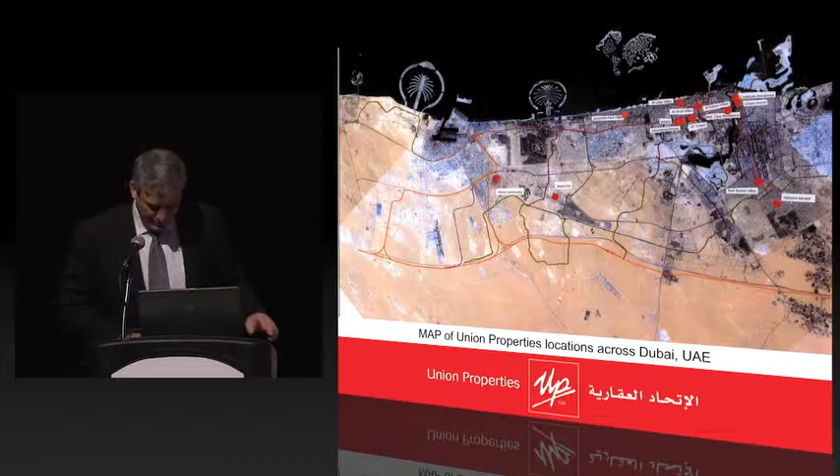Union Properties' success has been directly related to Dubai's success. We're a publicly listed company with shares traded in the Dubai Stock Exchange. Next year, UP will celebrate its 25th year, and our growth from a small portfolio of real estate assets to becoming the third largest developer in Dubai.

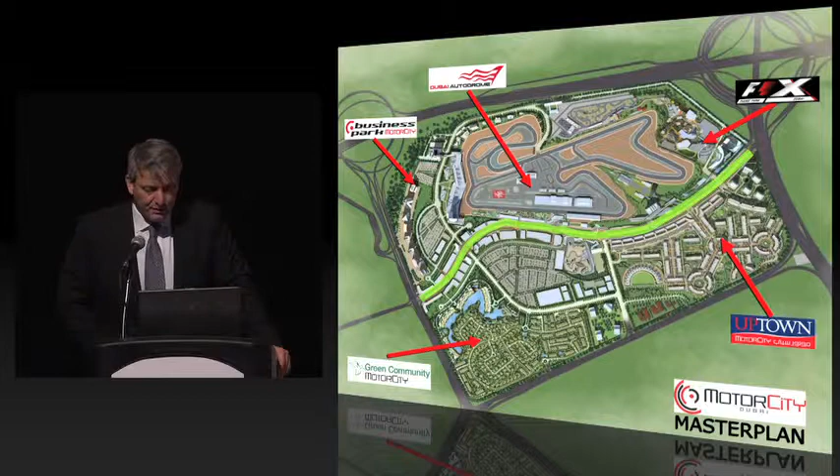The first is Motor City. What we've learned from this is scale. This is the master plan, comprised of 5 components, as you see here. It's literally built around a racetrack. Motor City is an entire city, home to 40,000 people when it is completed. The center is a Formula One certified racetrack.

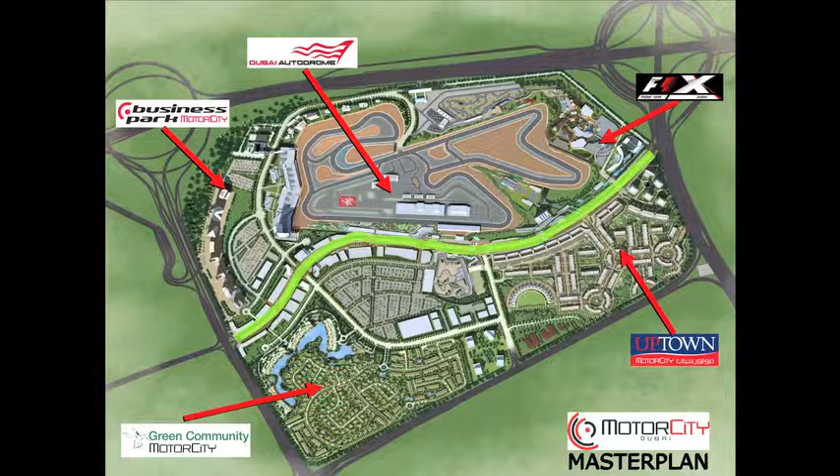Next to it is the F1 theme park. Then we have medium density residential, low residential, and the business park. A day at the races, our theme park, which is still under development. If anybody is interested, we're looking for a JV partner to finish this one.

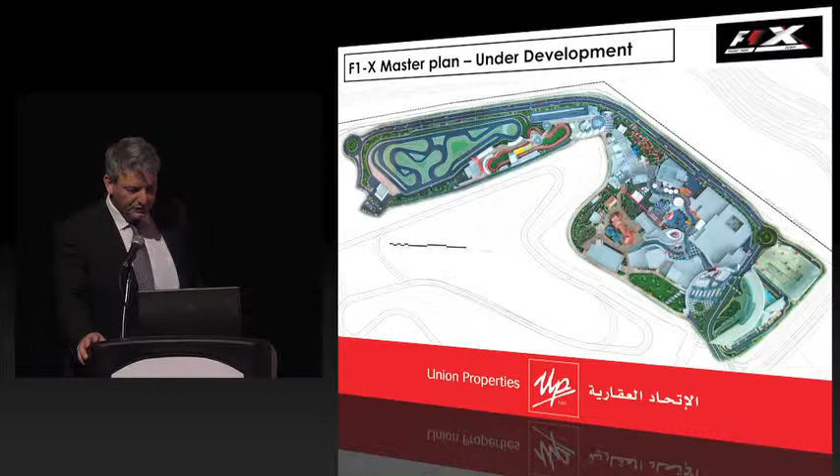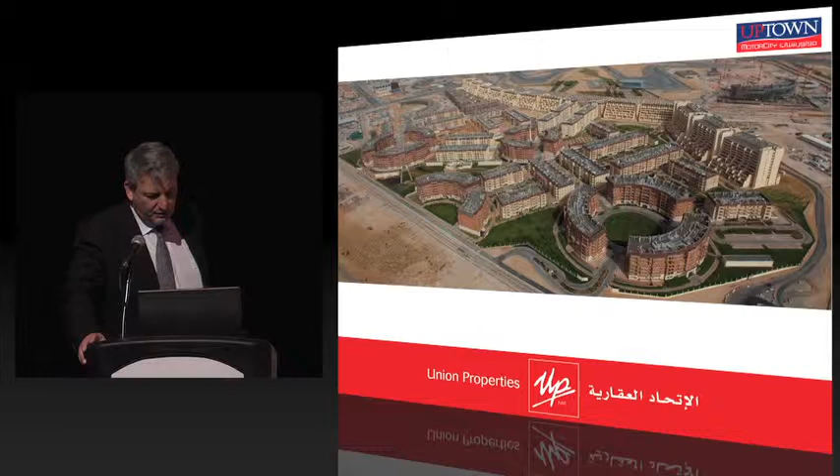This is the medium-density uptown Motor City, also 100% built. The original design concept was a European spa town. Various unit types. Leisure facilities include the pools, gyms, playgrounds, and a high street, a commercial area with retail services and F&B.

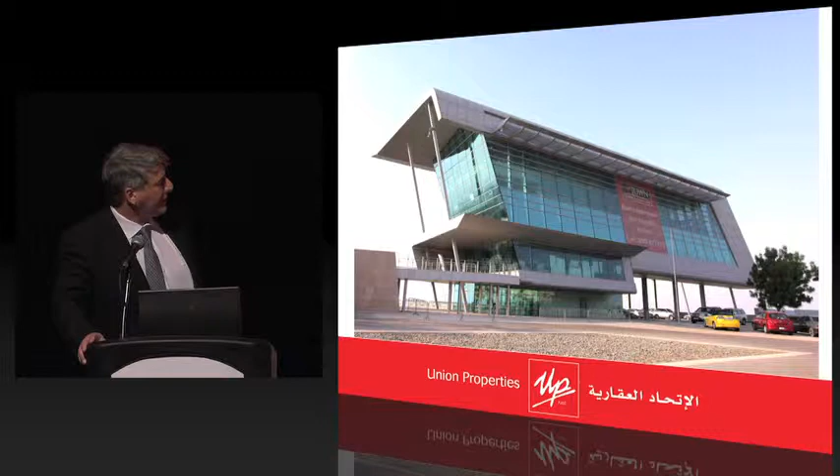The last section in Motor City is our business park. That's their control tower and our management office.

Moving across town to the Central Business District, we have our next project, which is the Limestone House. A unique concept that's been designed to the time-honored specifications of the master stonemason. The window length, breadths, heights are all determined by the traditional dimensions of masonry blocks. It's adjacent to the Ritz-Carlton Hotel.

There's also 16 residential spaces that complement it. It's designed by Gensler in San Francisco and built by Bouygues.

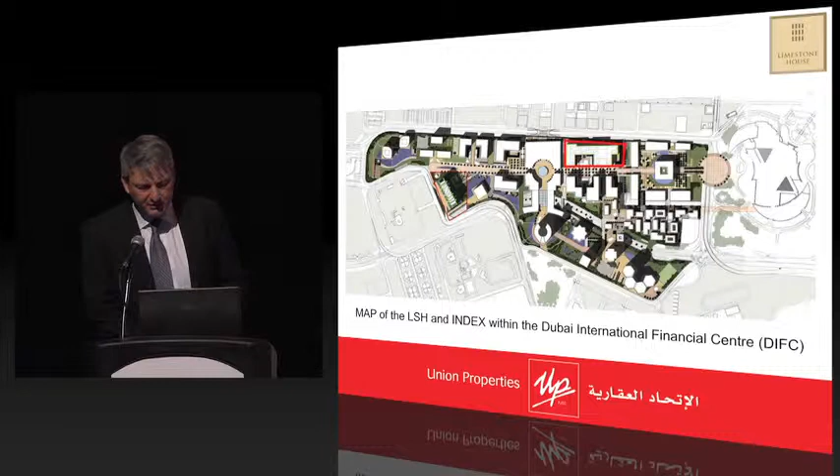It's worth mentioning a little bit about the DIFC - a very unique product. The Dubai International Financial Center is a city within a city, a financial city within a city. In the center of Dubai, they've segregated 45 hectares of space, and though it's within Dubai city limits, it's administered separately with its own governor, its own legal jurisdiction, its own court system, all based on international business law, which takes precedence over local laws.

It's a 100% free zone, allowing foreign ownership and zero taxes on income and profits. Unlike some of the other financial districts which become ghost towns after trading hours, the DIFC is a center for living, working, shopping, F&B, entertainment, as well as cultural and leisure activities.

In total, there will be 40 towers, all built on a common podium. The built-up area is approximately 4 million square meters.

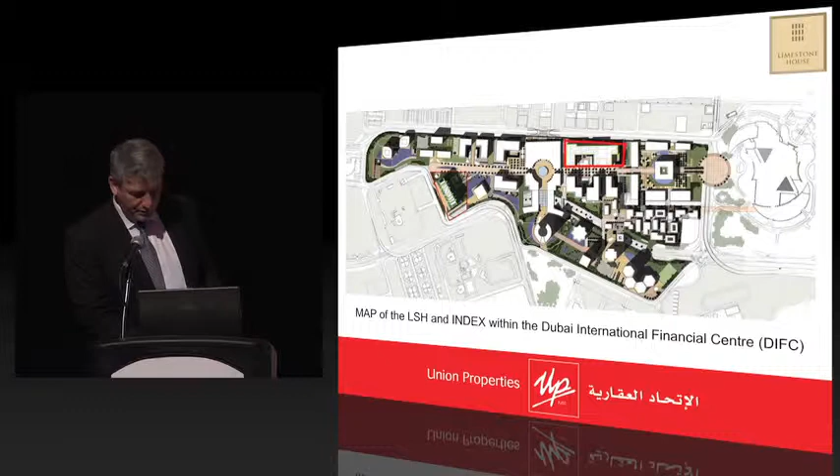Finally, getting to the Index - it was the change in legislation in Dubai which allowed foreigners to own freehold property that allowed Union Properties to take on the idea of combining both what we saw in Motor City, which was scale, and what we were accomplishing in the Limestone House, which was grade A residential, to take on a project like the Index.

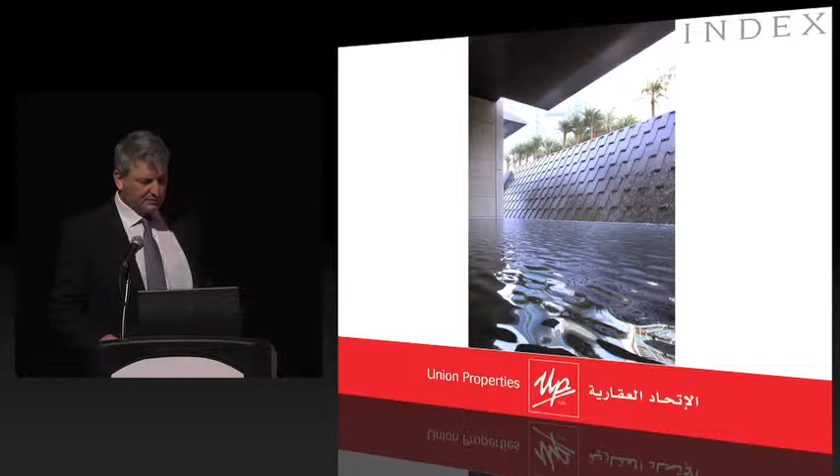It's destined to be a regional landmark, if not an international one. These are some images of the entryway to the commercial and the retail, and a rendering of the penthouse.

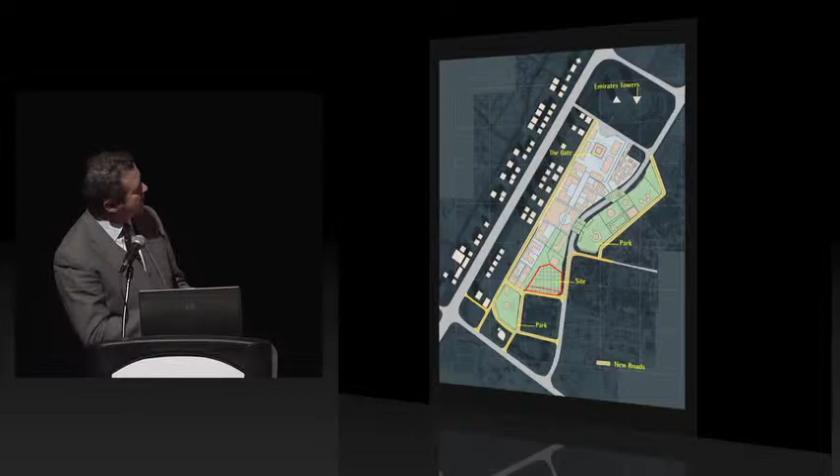So one of the first things we did is really try and think about the context that the site's in. There were views from the site across to the Gulf, and also back towards the city and the Emirates Towers, which were already built. And then there was the anticipation of the Burj development over on this side, and a number of other developments in the Palm.

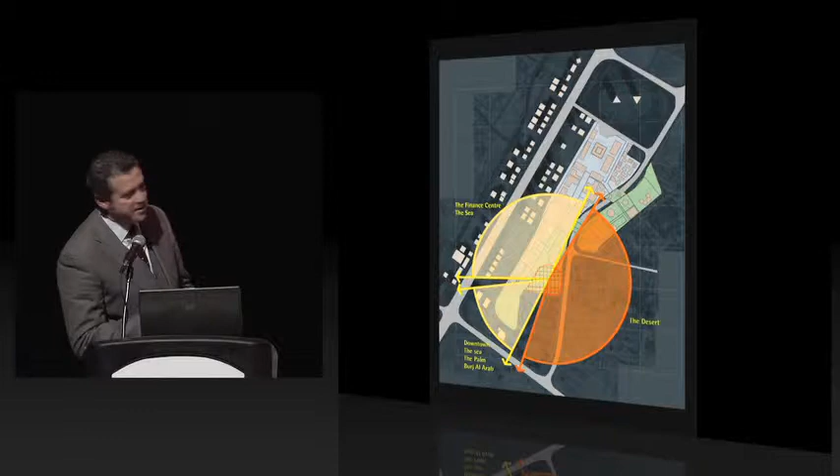But pretty much on this side, there were no views. This was really out to the desert. At the time, things have changed, but originally that was what we felt was happening there.

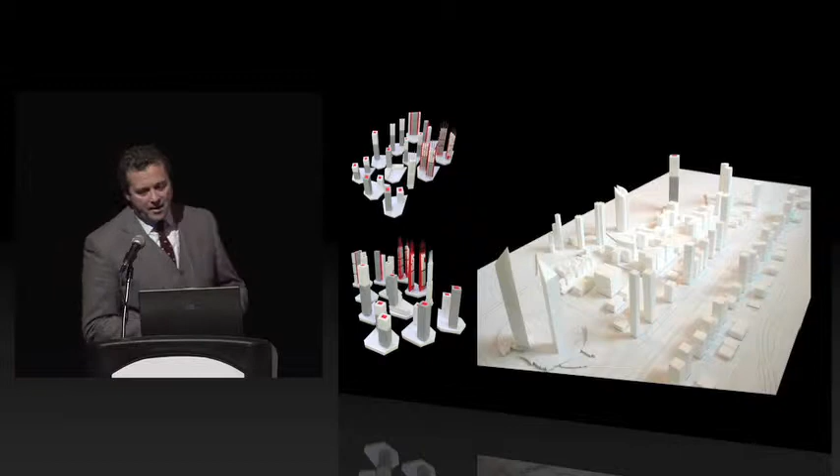Like a lot of people, we start a very intuitive process in thinking about buildings through physical modeling. And these are just a small example of some of the schemes or some of the forms of building we started to play around with.

This again is our very sketchy model showing how we anticipated that master plan to be built. And you can probably see from some of these very early models, we had some idea of how the building form may take place.

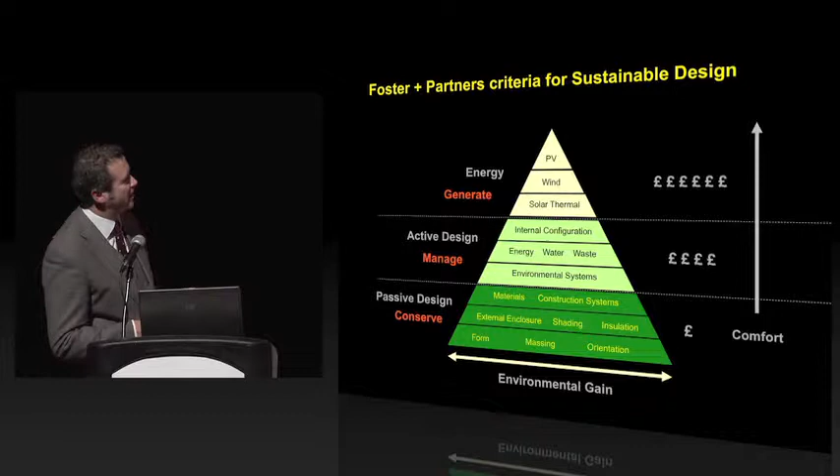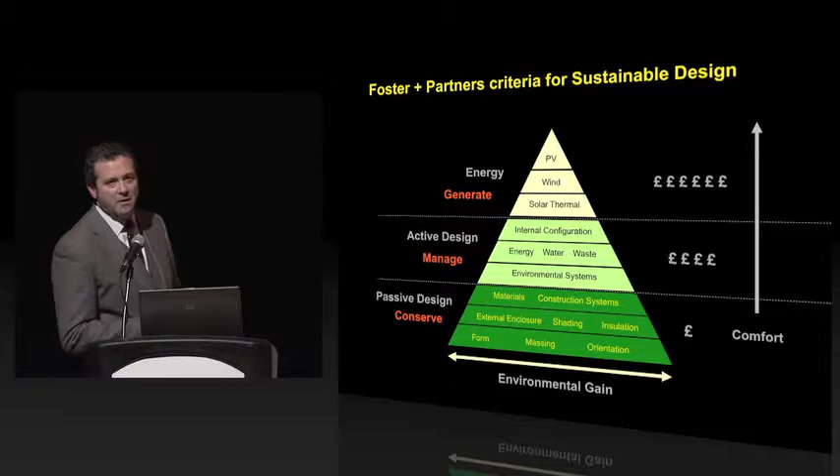One of the things we do when we think about buildings, and particularly sustainability in architecture, is use this diagram quite a lot. It's quite simple, really. The thinking, the non-active elements of architecture and design sit at the bottom of this triangle - things like material choice, systems of construction, external enclosure, massing of the building, form of the building, orientation. All those are design processes we can go through, and you get the biggest bang for your buck because the cost of those things is really with the architect and designer. It's not until you move up this triangle that you start to use active systems and the associated costs. The purpose of this talk is to talk about how we approached the design and form of the building using ideas from this passive design part of the triangle.

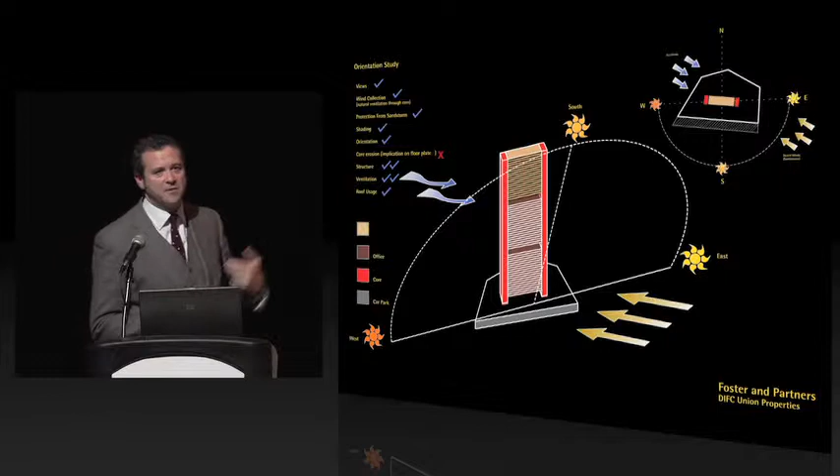Simple diagrams like this are very useful because they question how the form and orientation of a building can work. We simply ask, what happens if this is done like this? What happens if this is done like this? What are the positives and negatives? This is one of a number of diagrams we went through, and this is the one we ultimately settled on. The idea of thinking about a building without a central core, and pushing the cores to the perimeter of the building, was something we thought about very early in the process.

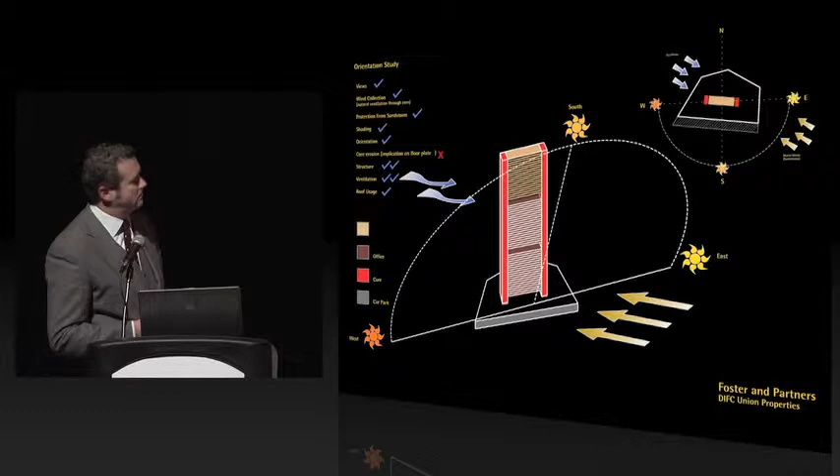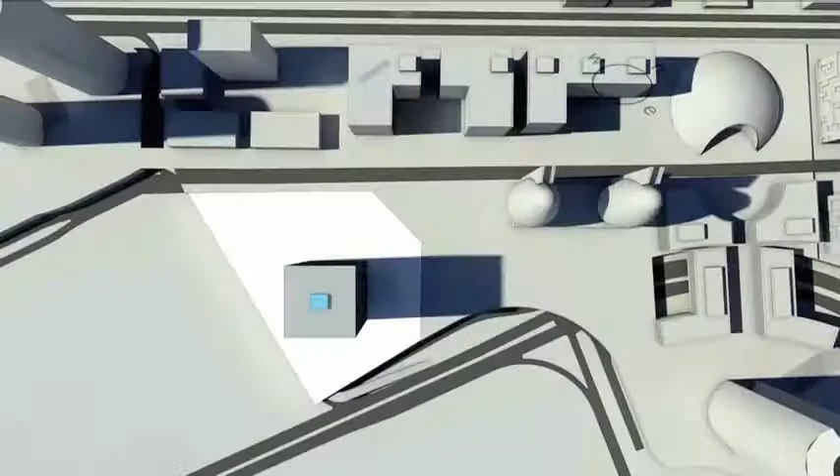This is a small animation which will explain the diagrammatic process of how we got to the building form you see today. If you think about a simple building form with a central core, one of the first things we thought about was orientating the building so it faces east-west, then taking the core and splitting it away from the center, pushing it to the perimeter of the building on the east and west side. That helps reduce the solar load onto the building.

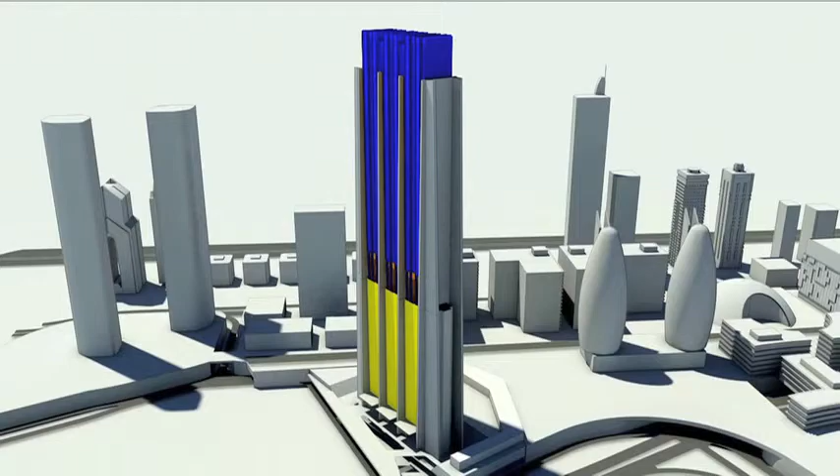We then bring the residential building and sit it down on top of the office building, and introduce the idea of vertical fins which help self-shade the facade. On the south facade, because the building's orientated, there's only one facade on the south, so we had to introduce shading elements - external shading which protects the office floors.

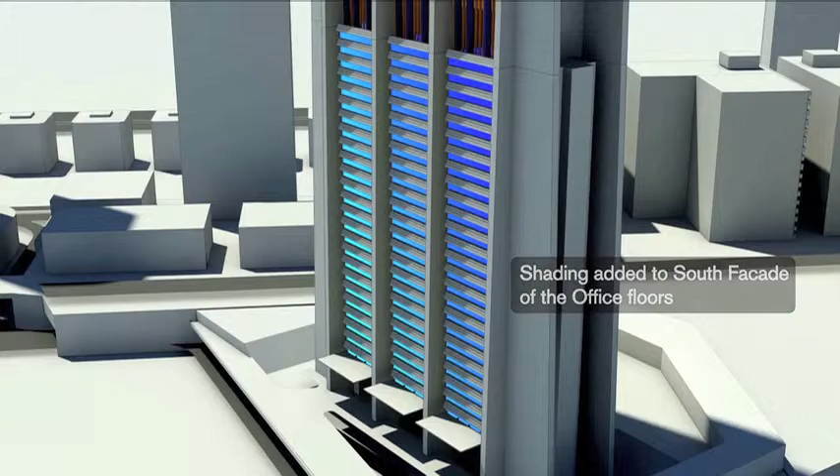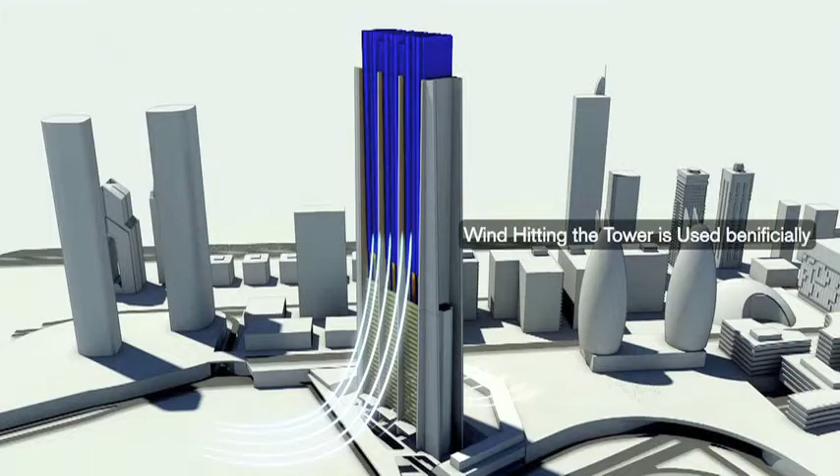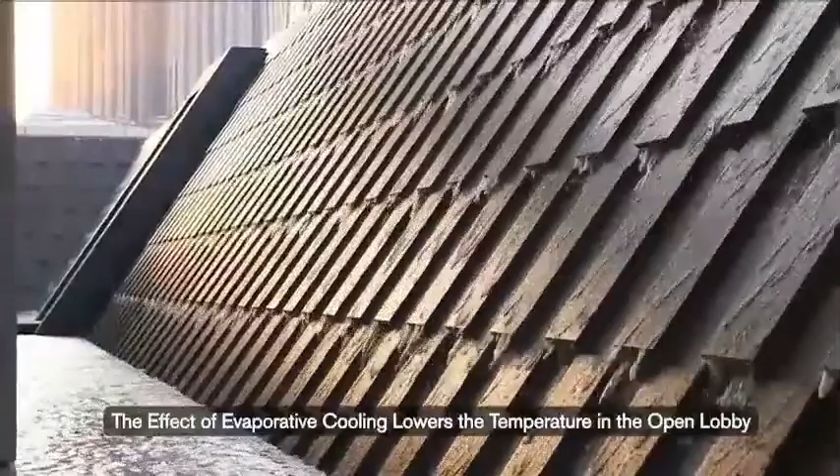On the residential building, we also introduce the idea of ventilation slots, which allow occupiers to open up in the winter months and naturally ventilate the accommodation. The form of the tower also enables us to capture some of the wind flow that hits the tower and drag that wind flow over this large water feature, using an evaporative cooling effect in the lobby space, which I'll show you a little later on.

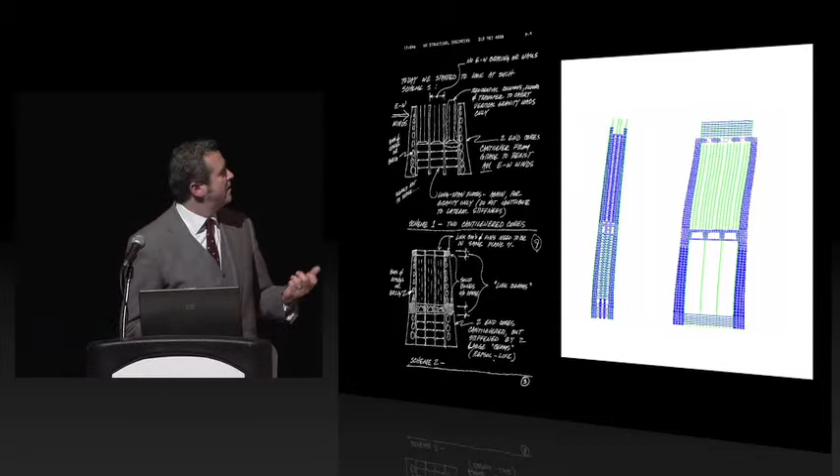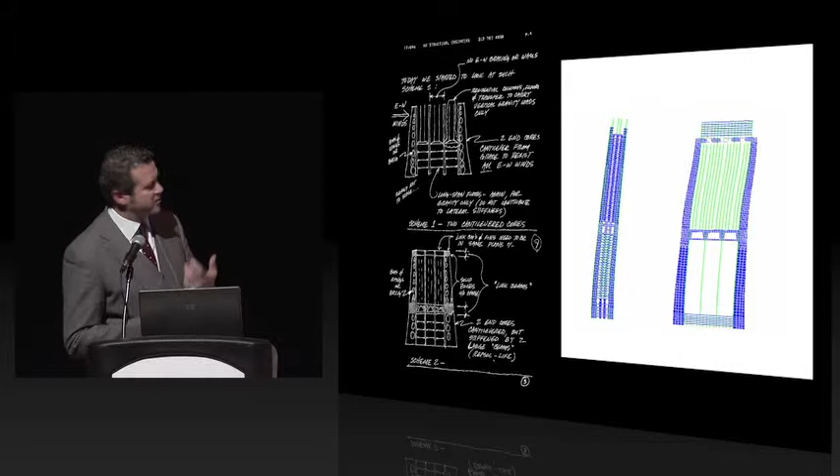The other thing with a building of this size and shape was the structural system and how we were going to support it. One of the early things we did was find an engineer capable of building a building of this height. We came to Chicago and worked with Bob Halvorson to develop a structural system that, in our minds, had to be expressive and simple, but also capable of supporting such a large building. These are some very early sketches of ideas we went through, and some of the models tested to get to the form.

You can see here it's very complicated - we actually have a residential building complete with numbers of walls, divisions and partitions, a very complicated concrete structure sitting on top of a large, open plan, clear span office floor. The idea with the office floor was, in a financial center, we wanted to create a fully flexible floor plate and try to avoid any internal columns or interference. We have to provide a core running through the center of the building which services the residential building, but we tried very much to create these large spans.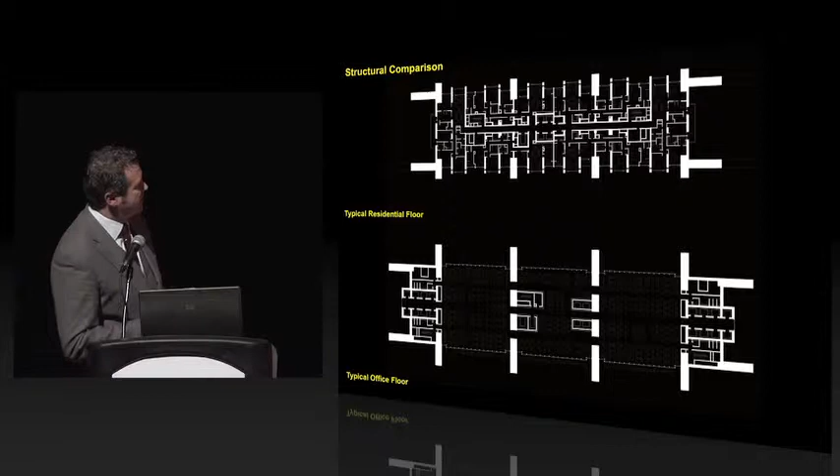This was done with steel, 24-meter long steel trusses spanning between the bays. The large concrete building was supported on a huge truss, a concrete beam that sits at the mid-level of the building and visually separates the residential building from the office floors below.

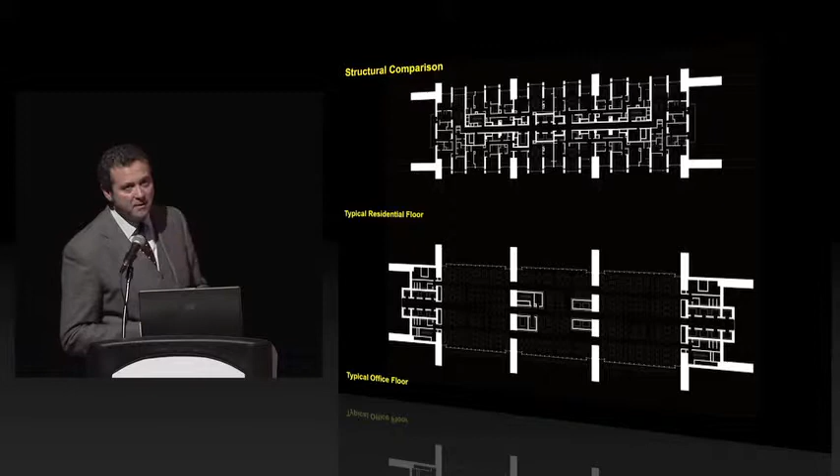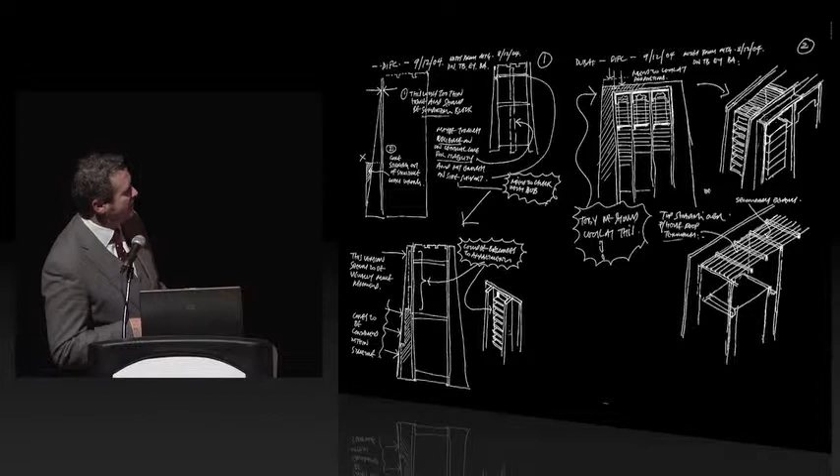The idea of introducing shading elements at the top, and balconies where the office cores drop off at the lower levels. Could we use the spaces within there - partly for structural supports and ties, but also as amenity spaces for the apartments?

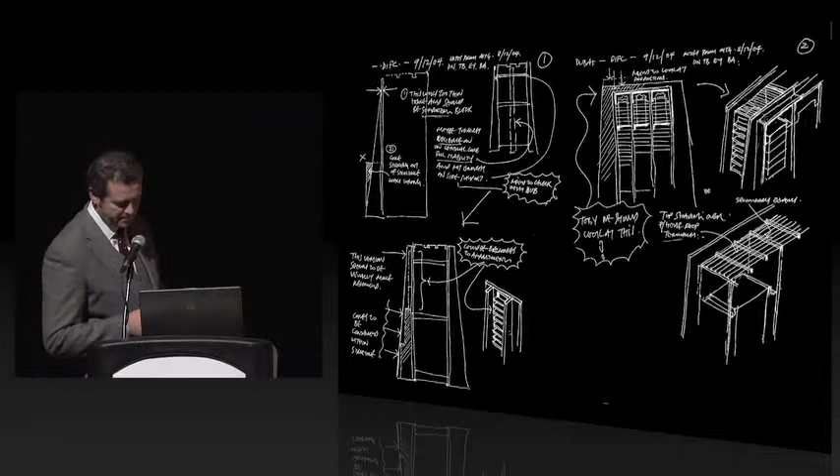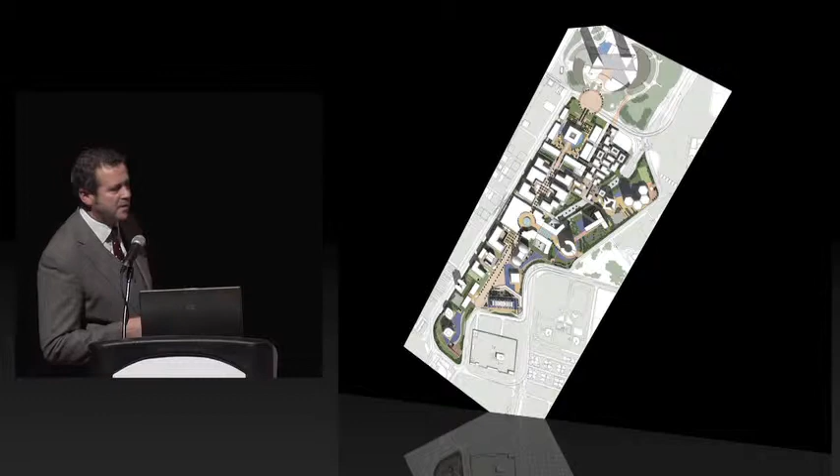We were also very interested in how the building interfaced with the master plan. It's actually quite an interesting master plan because it's primarily a pedestrianised space with all the parking kept below. As Thomas said, it's about a mixed-use development, so there's a live-work type of environment.

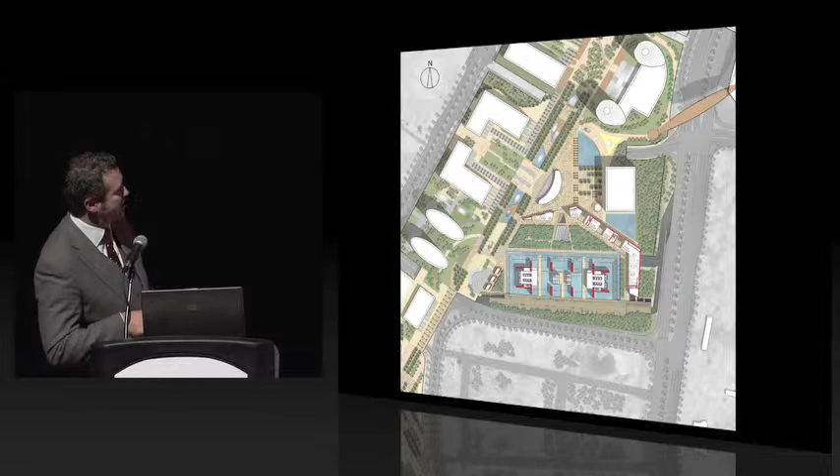So we wanted to connect into that, but also provide an amenity space for people using the buildings, and ultimately came up with a landscape park within our own perimeter with a number of buildings that surround that. These are retail buildings, and below that there's also retail which connects back into the main retail strip.

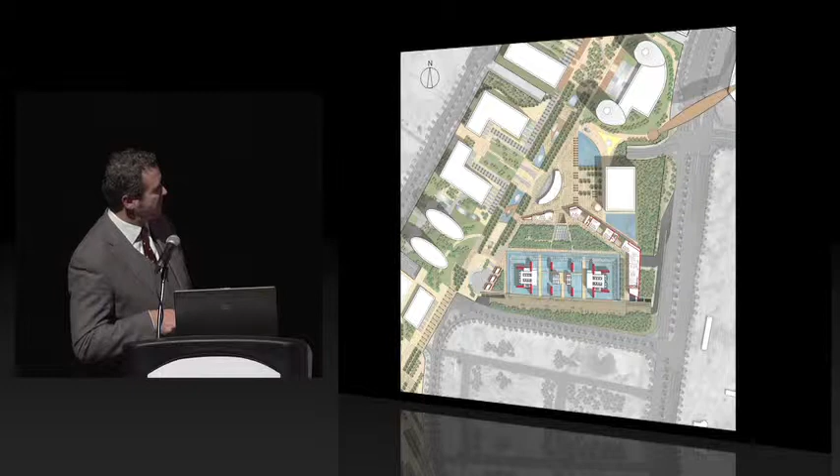And then the building itself, the podium was cut away to enable us to drop the building into this recessed area with a water feature which runs around the edge. So when you approach the building from this side, you get a feeling that the building is actually hitting the ground and is grounded.

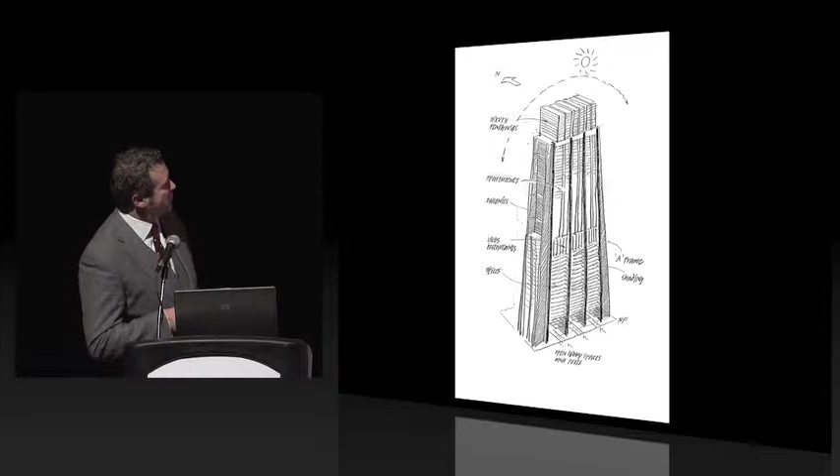The ideas of mixed use, the different functions in the building, and the orientation - this is one of Norman's sketches which shows the feeling of how the building was put together.

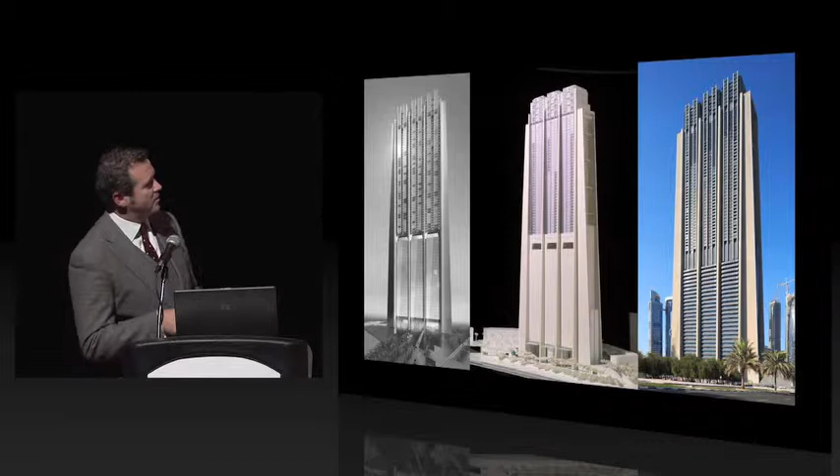As I say, we work through different types and different mediums. Right from the beginning, these are very early renderings of the buildings, to the sort of sketch models that the architects actually build, to ultimately the delivery of that project. You can see we try to be very rigorous about how we follow through on the project.

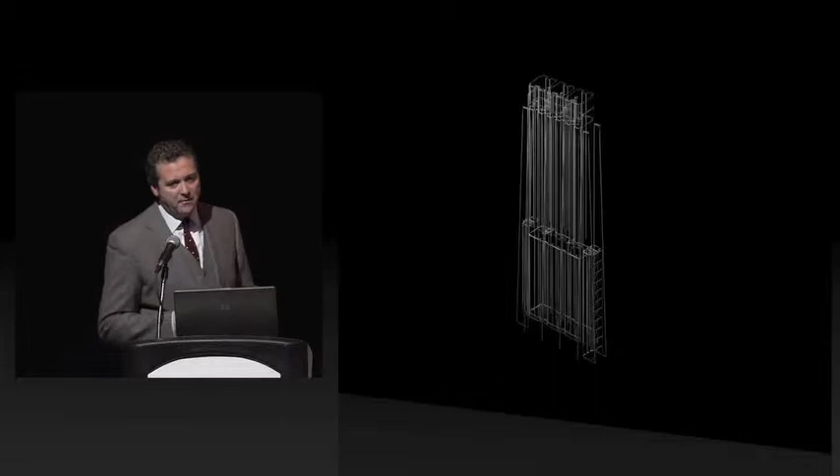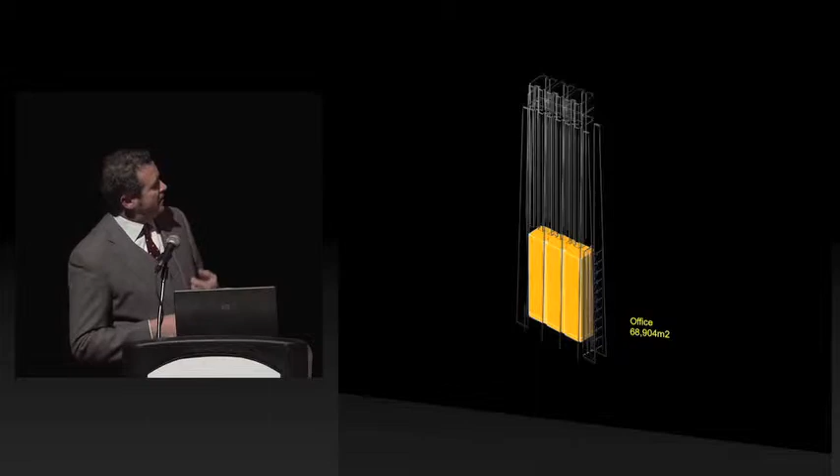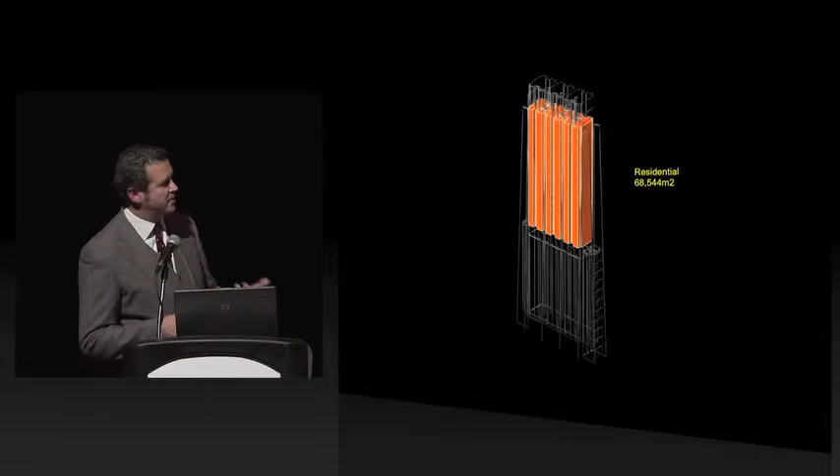So the brief that we were given was really the two primary functions, the office floors and the residential spaces. The public realm, the entrance to the building, the office is about 70,000 square meters of office space. Residential apartments, again about 70,000 square meters, varying from 1 bed to 2 beds up to 5 beds. Crowning it out are some very exclusive penthouses which sit on the very top of the tower.

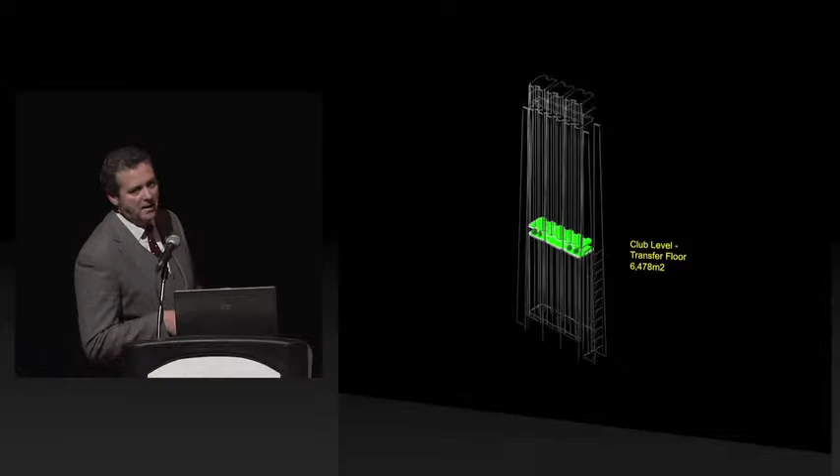The office floors and residential floors are separated by what we call the club level, which will ultimately house restaurants and swimming pool facilities for the guests. But it's also the front door to the residential - people coming up into the building get into a high-speed lift and actually arrive at this point. So your first appearance at the residential is at the mid-level, with fantastic views over Dubai.

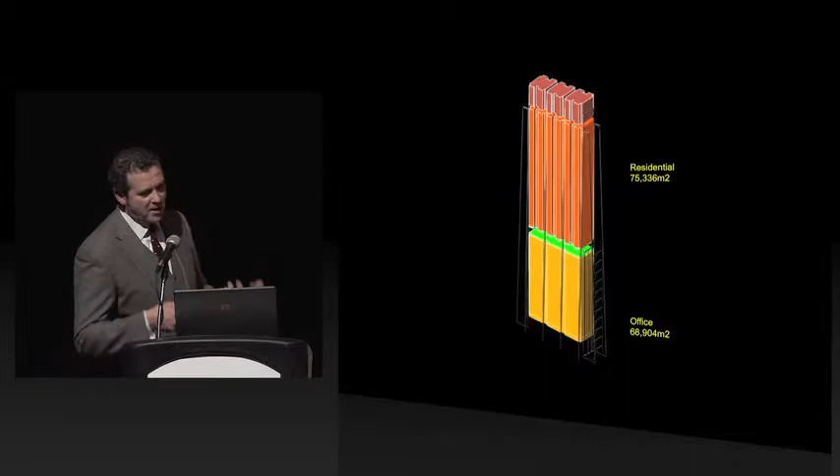So bringing all these components together, working with the structural engineers to bring a system that holds all these components together - the cores that slide into the east and west - and the final diagrammatic configuration of the building.

But we also wanted to look at how do we treat the large mass of concrete fins. We ultimately chose to clad them in a precast concrete material with some relief on it to give some appearance of shadowing.

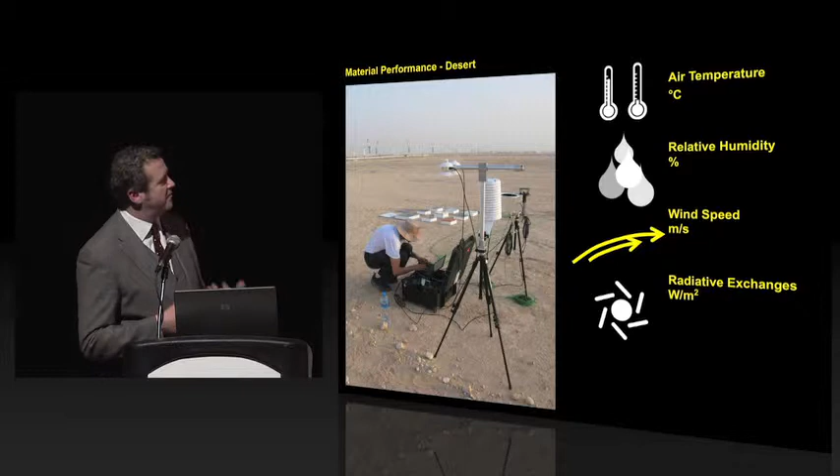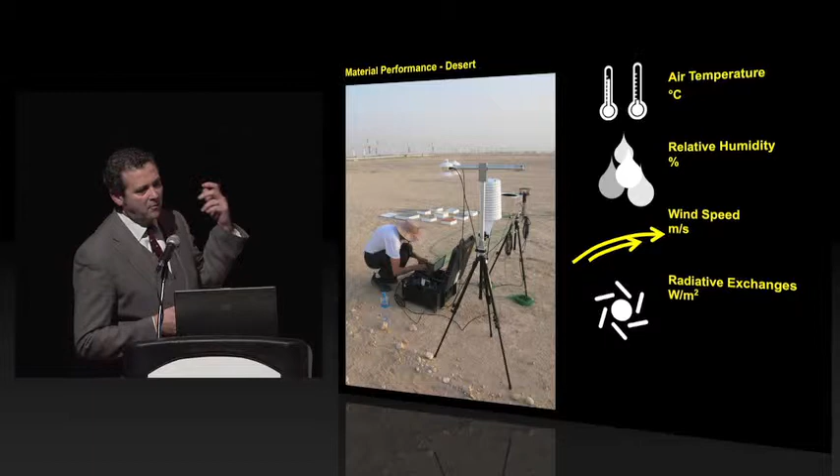We've been fortunate - we've done a lot of projects in the Middle East, and a lot of work trying to understand the climate and the performance of materials in that climate. Because it's very important when thinking about sustainability, what types of materials do you use for the building. We actually have a research team that's spent time out there looking at different types of material and understanding how they perform in that climate, and we have reference materials as examples.

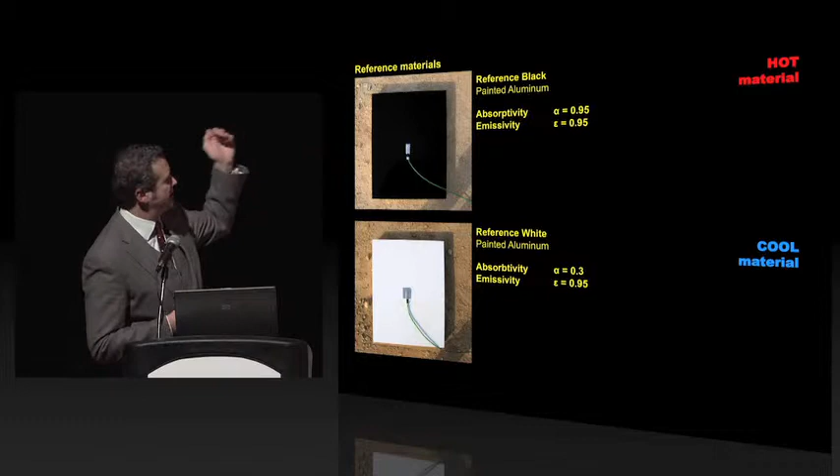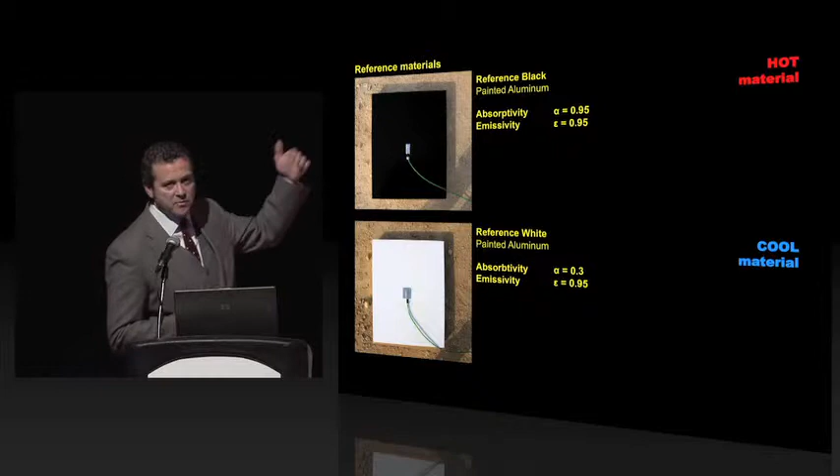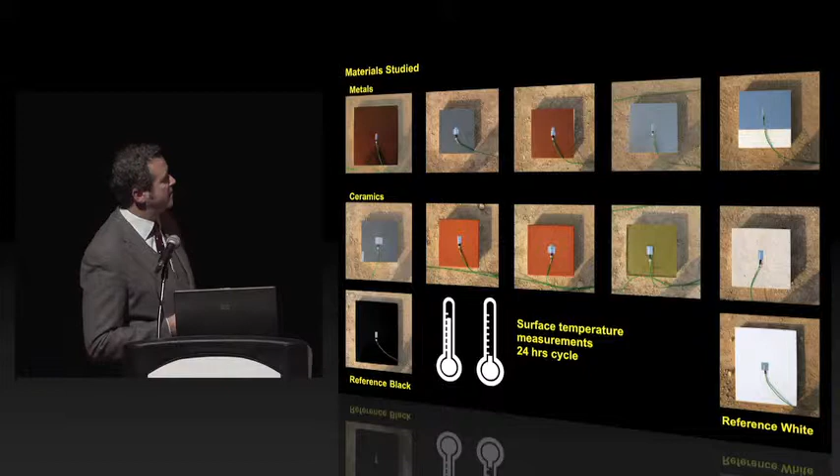You take a black material with absorptivity and emissivity about the same, and then a white material which has less absorptivity, and use those as benchmark materials. We compared against them a number of different materials to see how they perform in that climate. For us, we were looking at solid precast concrete elements.

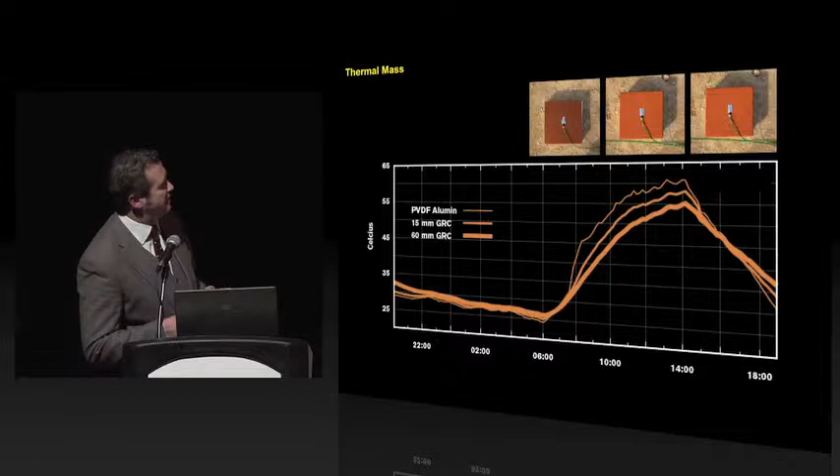Some of the materials we tested were simple aluminium sheeting, like you'd find in metal-clad buildings, and glass-reinforced concrete elements. But ultimately, we wanted to use something more solid than that.

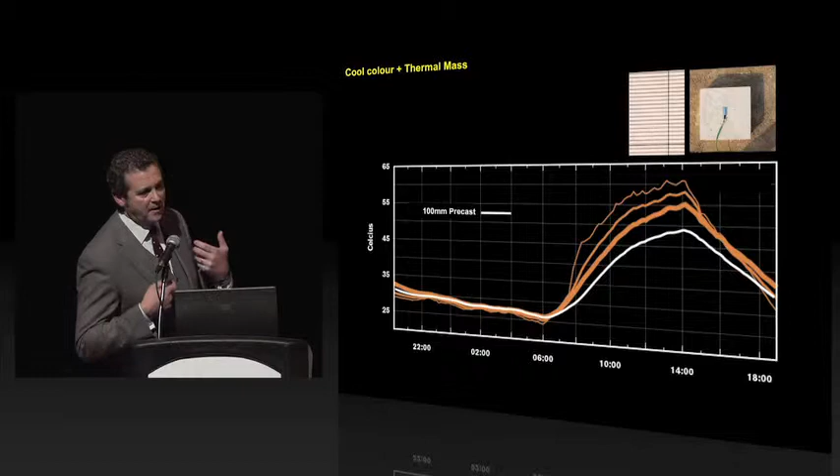These are close-up images of the precast panels clad onto the building. Using these thicker materials, and the coloration of those materials, actually gives us good performance in terms of the heat load that comes into the building, which helps reduce the energy consumption of the building.

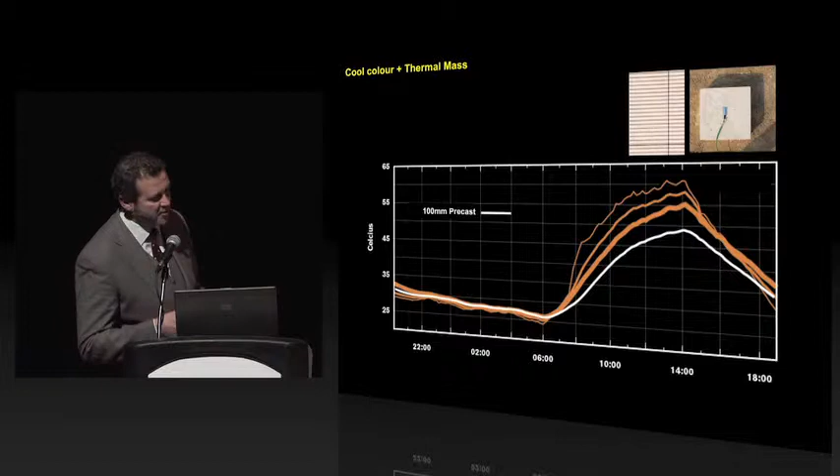How do we know that? We've done some very initial testing of the building's performance, and will continue to do that, but our initial results are showing quite positively. We took some measurements on a day which was 36 degrees at Dubai Airport.

In the open lobby space at the base of the building, we found a temperature difference of minus 3 degrees. So the idea of a microclimate being created in that lobby was proved out.

The office floors, although still unoccupied, showed the north and south facades at a similar temperature, demonstrating that the shading devices were working.

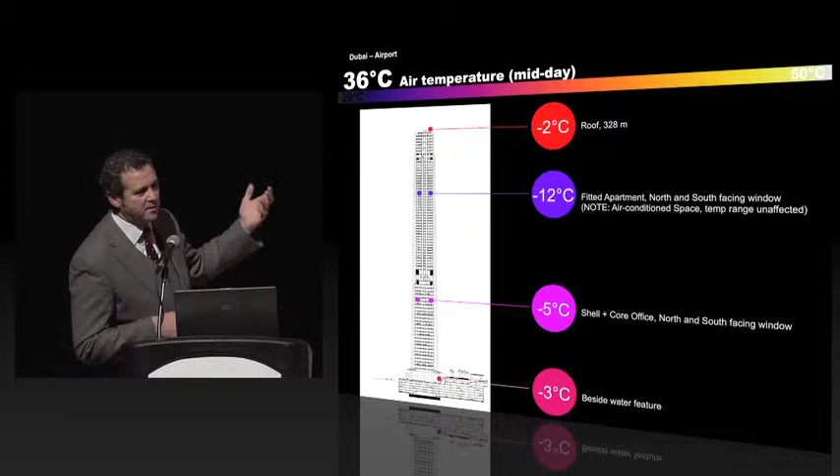The residential space is more difficult to measure because it's fully air-conditioned, and the measurements were taken in summer conditions, so the natural ventilation wasn't being used.

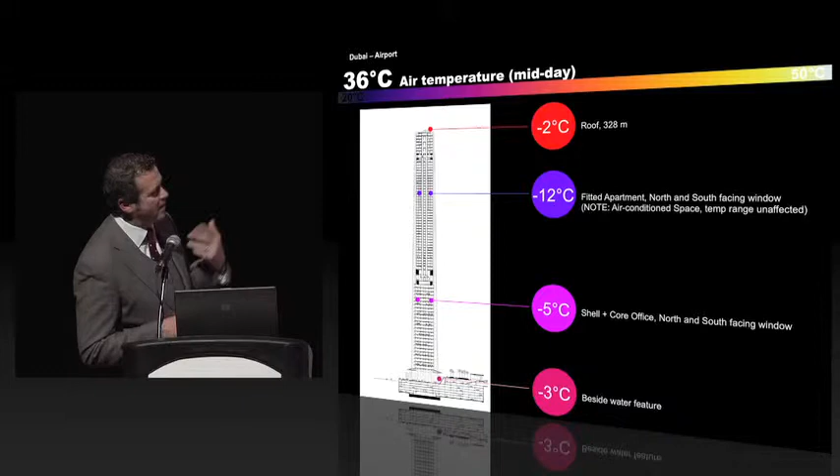Typically at the top of the tower, on the outside, you're getting a couple of degrees loss through air movement, which you'd expect.

One of the key things at the bottom of the building was about the public realm and how people interface with it. We didn't want to enclose the bottom in a typical glass enclosure; we wanted to create a space that was deemed external but shaded.

These elements were ultimately unenclosed elements. There's water movement, large water pools, a cool space in the desert was what we were trying to achieve. In the completed building, these spaces are very successful with very small glass enclosures where the office cores come down, but the rest of the space is very open and a great space to walk around in.